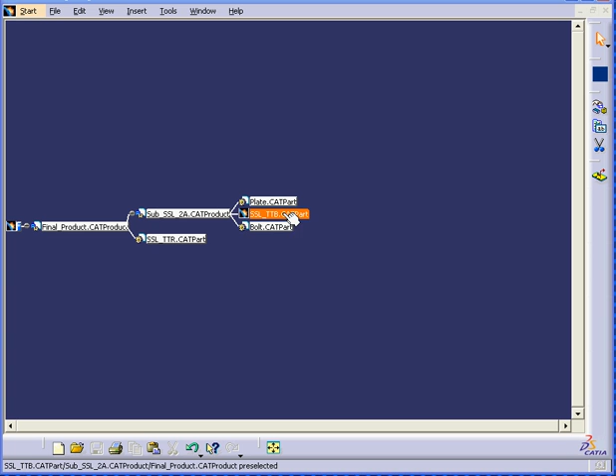We seem to be missing a part. Let's click the desk to go find it. Right-click on this part which appears to be missing. Select Find. And here's our part. Open it. Now let's close the desk. And here we have our components.

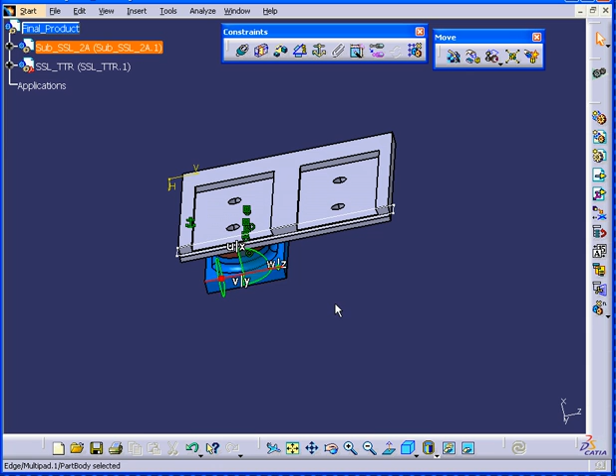Next, we're going to use the compass to position the components. Now we need two of these components for this assembly. Let's right-click and copy. Right-click and paste at the assembly level. You'll notice that when I copy, I click at the component level, but when I paste, it's at the assembly level.

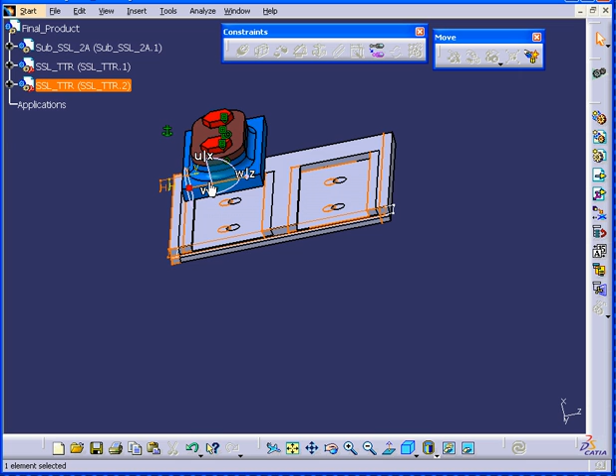Now on the component I just highlighted, let's move it. Oops, it's actually not highlighted. Okay, I see what's happened. I've copied the wrong component. All right, let's fix this. Right-click. Let's go back to the assembly level and delete the component.

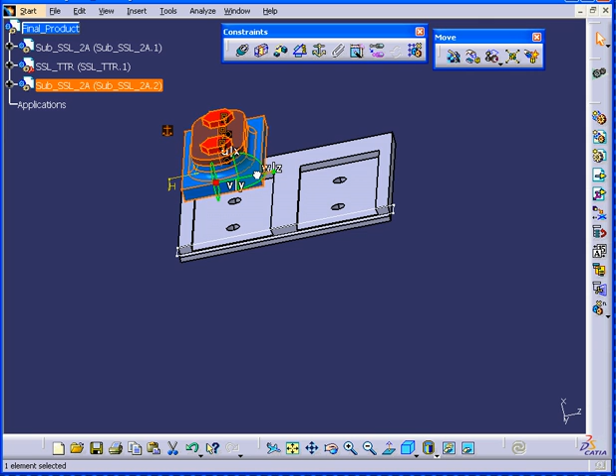Now let's go get the right one. Right-click, copy, and back to the assembly level where we paste it. Okay, now we've got the right component, and once it's selected, we can move it. Okay. Now let's rearrange our tree. Move it down, apply, click OK.

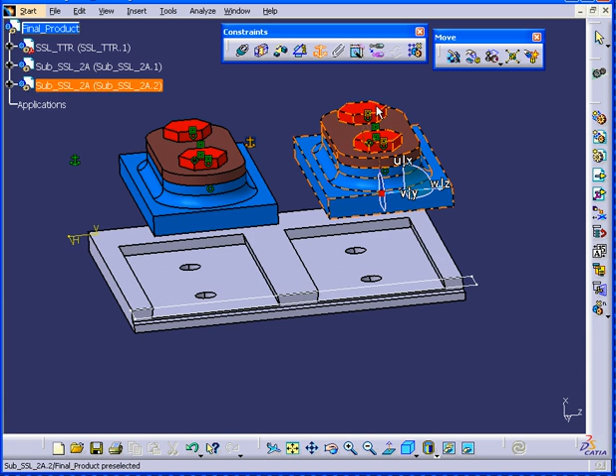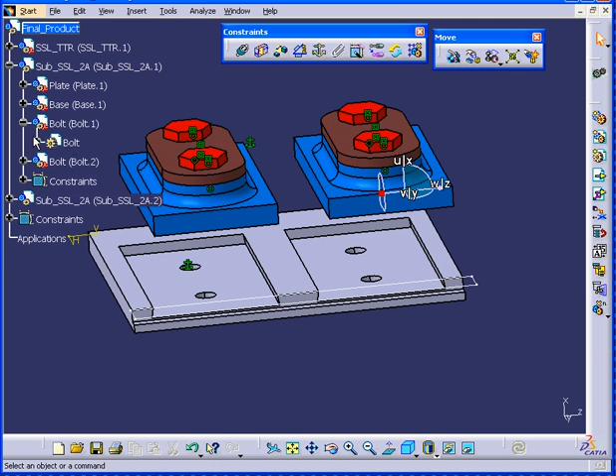Now let's use Fix Component and fix this component. We do need to hide these bolts. So let's right-click after we expand the specification tree. Selecting Hide Show, one bolt is moved to No Show. But we do need all four to disappear, so let's bring this back. And let's go deeper to the part body level. Right-click, Hide Show, and now as you can see, all four bolts are hidden.

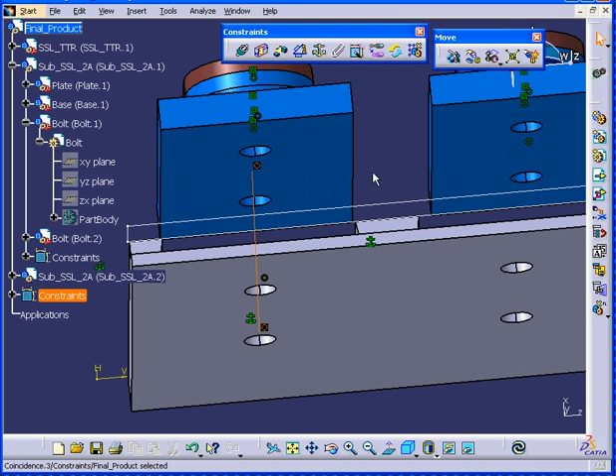All right, we're going to constrain our component now. First is the coincidence constraint, to constrain this hole to this hole. Second, this hole to this hole. Third, this hole to this hole. And lastly, this hole to this hole.

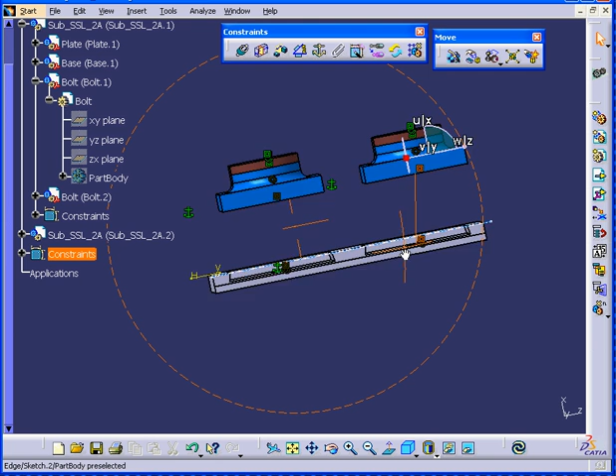Next, we will apply the contact constraint, this face to this face. This face to this face. Let's hit Update. As you can see, our components are constrained. All right, let's bring the bolts back. Right-click, toggle back to Show. OK.

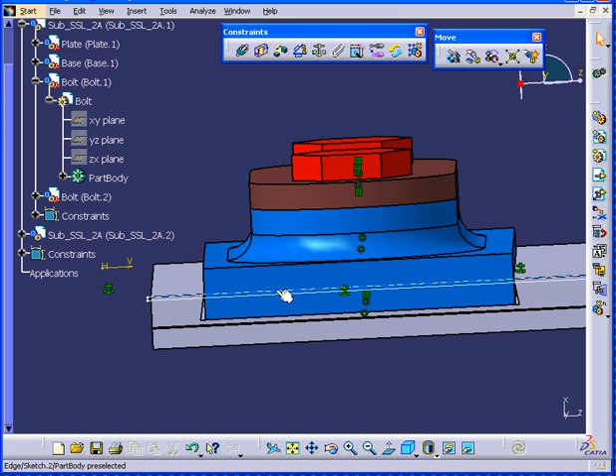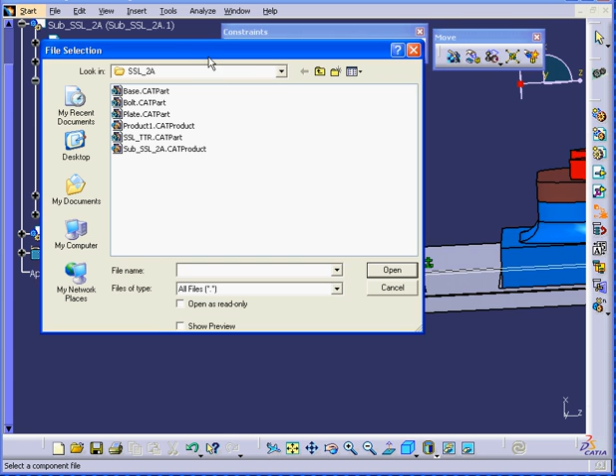We seem to have a problem here. It looks like this part doesn't match the base exactly. Well, let's replace this component. I can use the Replace Component function from the Product Structure toolbar. Or I can right-click on the component, select Components, select Replace Components. Now we navigate to find the right component and we open it.

CATIA prompts us, asking us if we want to replace all instances of the selected element. We will choose Yes and click OK. Now, as you can see, it fits perfectly with the base. Sometimes when you replace components, some constraints will get broken. If that happens, you will see a yellow exclamation mark in the specification tree next to the component.

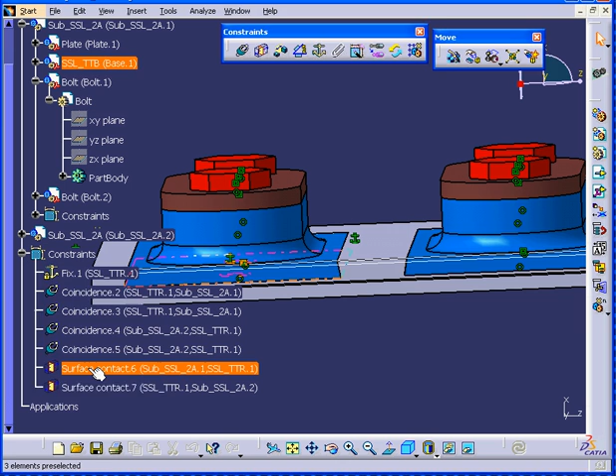When this happens, you have two choices. You can delete the constraint and create another, or you can double-click on the constraint and select More. And right here, you will see the word Disconnected. You'll need to click to reconnect and then click OK.

Next, I'd like to show you, let's collapse and expand the plate component. Okay. You'll see I'm in the Part Design workbench. I double-click on the plate at the part level. All right, let's add some chamfer to this part. Click on the edge, enter a value of 1/8 of an inch, hit Tab, and preview. When I click OK, you will see that the changes will be applied to this plate as well.

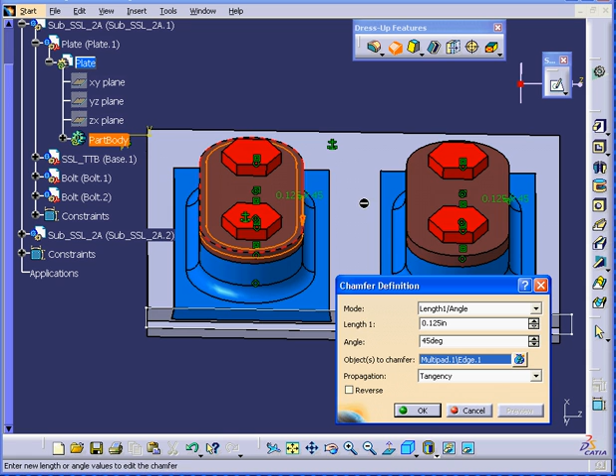As you can see, basically you can make adjustments at the part level anytime. After making your adjustments, you may go back to the assembly level and keep assembling your components. And this concludes our third tutorial on assembly.